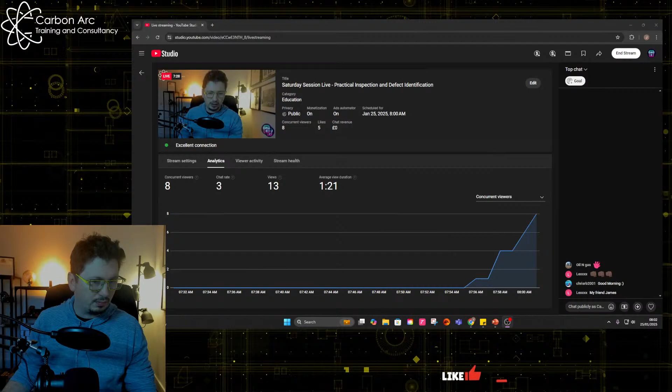First thing for us to capture - let me make sure I can see the chat as well, because there's too many things to do. There we go. Right, the first thing we need to make sure we cover is what the requirements for this practical session are.

The exam is used in two different versions of CSWIP, your 3.0 and your 3.1. It's the same practical now. For the plate, if you're doing a 3.0, you'll also do a fillet weld, but if you're doing a 3.1, you'll just do these 8 segments.

So again, I keep trying to point everybody to this document. You can go on Google and just type in CSWIP WI-6-92. This is the scheme document that tells you everything you need to know about your qualification, your entry requirements, your examination, your renewal, all that type of thing. A lot of questions are answered in that document, but this is where it tells us what the practical is.

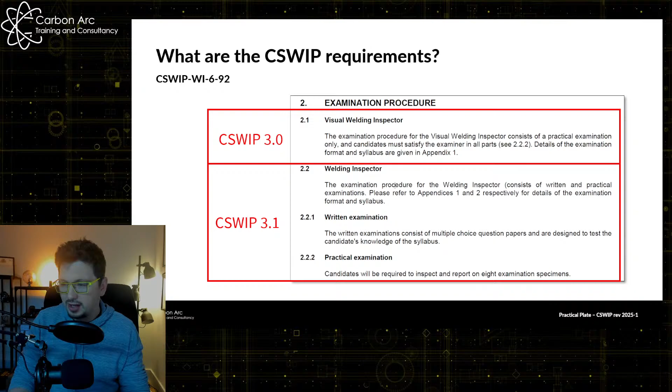So if we go to those sections, the references, those appendixes, we get this for the 3.0. So you have 2 parts. 3.0 is just practical completely, and you get a practical part A and a practical part B, which is your 8 segments and your fillet. You get 90 minutes for your plate segments, which is what we're going to cover today.

And then if you're in your 3.1, you're going to get 3 parts. So you've got your theory, your 80 questions, leading, all that type of thing.

Then you've got your welder quals and weld procedures, and then we have our 8 segments. Now, for some reason, they say 90 minutes in the 3.0 and then 1 hour 30 minutes for the 3.1, but they're the same. 90 minutes should be easily enough time for us to complete these exams.

If you're taking longer than that, or anywhere near that, you are looking in too much depth, and we need to work on the speed in which you're going through this. I honestly think this exam should take you, with 8 segments, about 45 to 50 minutes. That's what we want to be aiming to hit.

That gives us enough time for all of this settling down at the beginning of the exam, not being rushed, not being panicked, because the more panicked we are, the more problems that's going to cost us, making wrong decisions and stuff like that.

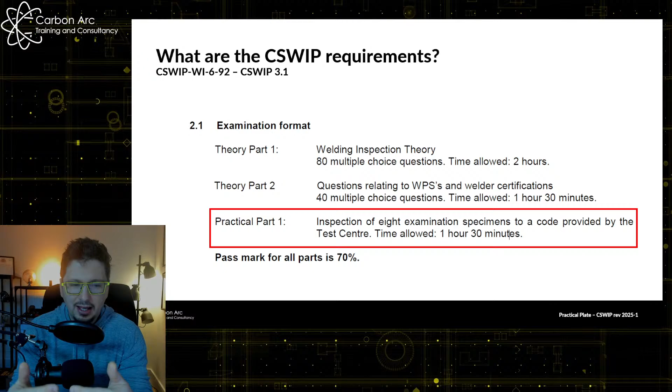So my first thing here is: only put down what you know is there. All the defects are really, really clear - there is nothing that's touch and go. Porosity, for example, was a really big thing for people - every time we picked up one of these samples we were like, oh, I can see gas pores all over it. Some of them were defect marks, some were really there. But when we look at the new acceptance criteria, porosity isn't there anymore, so don't go looking for it. Only look for things which are in the acceptance criteria and are clear.

I'm going to pick up one of these plates here - you probably see it on there. Does everybody see that defect? Give a heads up if you can, because if you can't, you shouldn't be inspecting, right? That's how big these defects are - we can see them a mile off. Now, some of them are tiny, but honestly, the ones which are 1 mil or less than 1 mil won't throw up a change in your mark. It's not enough to knock you out of a grouping or something like that.

That's where we get the exam requirements from, that's how you know. Now we should check this document fairly regularly, because it does change. The CSWIP committee meet often, a couple of times a year, and they'll look at how things are working and make changes. So always keep an eye on it and see what you need to hit.

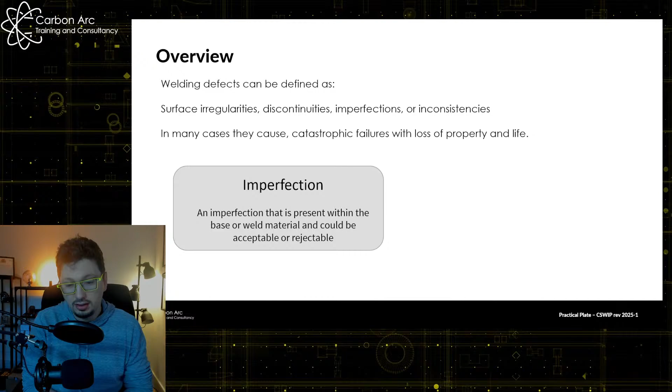The first thing we look at when we do any inspection is what imperfections can I see. We then need to decide if that imperfection is acceptable or rejectable, and at that point it becomes a defect - if we reject it, if we reject the imperfection, it's a defect. This becomes very tricky when we communicate about defects, especially when we mix British standards or ISOs and American standards, the ASMEs. These terminologies are really important - always read the question for what they're asking. This goes for both the practical and theory choices. Imperfections: anything out of perfect. Defects: things which are rejectable.

The whole exam is based upon really ISO 5817 - this is the European defect acceptance criteria. Has anybody seen this or used 5817 before?

It gives us time to have a cup of tea if I ask a question, you see, and I can check who's still here. Yeah, 5817.

It's a good standard. It's one based really on three acceptance criteria levels, yeah, and really it's one of my favorite, if that's the term for it, standards. What it allows us is to really detail every type of defect as we go down in one table, and nearly every defect is covered within 5817.

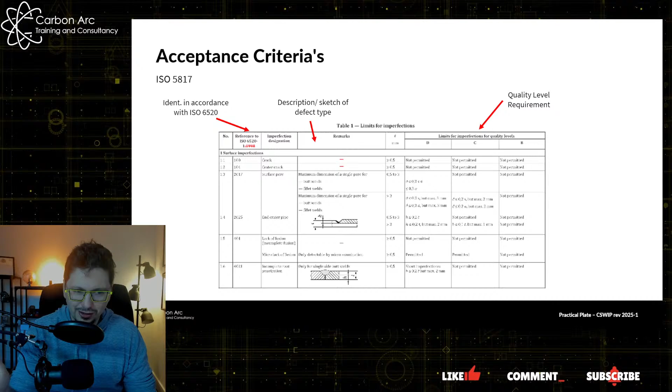We've then got our 3 levels of quality limits, okay? In 5817, we have class D, C, and B. So D is like why I wouldn't even bother looking at it if it was a class D. Class C is generally okay. B is our highest level of acceptance criteria within the standard. But often a lot of client specs work to things which are like B+. So B plus additional things that tighten it up a little bit more. But we can see on the screen here, we've pretty much got level B, everything's not permitted. Level C, some things are not permitted. Level D, most things are permitted with a bit of tolerance.

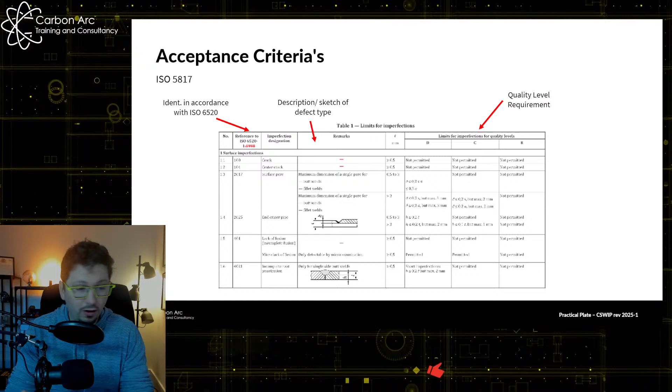Okay, so if we take that standard of 5817, CSWIP have really taken the layout of this to make your exams. Okay, so to understand these, have a look. You'll see some of the equations which are in 5817 are what you need to know for CSWIP because they're just taken from there. Right.

Okay, so let's start looking at the different parts of our welds and where we're likely to see issues when we do our inspection. Okay, so here's a macro section. What's a macro section? It's a relatively low magnification look at the weld, normally between 2 to 10 times mag. Okay, the idea here is we're looking for welding defects in areas of that we may potentially have imperfections within. You can often see the parent material, the heat affected zone, and the weld metal, but you can't see the grain structure. Okay, that's a micro examination, and micro exams are done at much higher magnification levels, depending on the material we're doing. It could be 2,500, 3,000 times magnification.

But using this macro here, we can identify a couple of different places. So in our exam, we are not going to be able to see internal defects. Yeah, so everything we're seeing are surface breaking imperfections. Right? And in the main, that's going to be on a weld toes, in the cap, and on the root. Okay. If you're trying to work through welding defects and work out what's happening and try and commit things to memory, just take all the internal defects and just get rid of them for the minute. Right, we will only see them when we come to do a macro or NDT of some type.

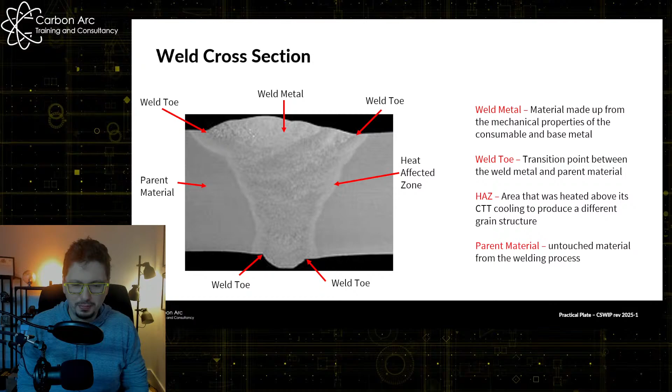We need a little bit more while we're waiting for people to tell me if they can find tungsten or not. Yeah, this is where it feels like I go quiet as people try to type away. Great content, me sitting here staring at the screen waiting for someone to reply. If anybody's going to reply, of course, I could sit here for 5 minutes and nobody type anything.

Tungsten would be within the body of the weld. Exactly, thanks Chris. Yes, Batam, hey, body of the weld. This is where we get our touchdowns, so we're going to bury the tungsten into stop starts or in it.

What welding process does that appear in? And I'm asking that, I'll wait for everybody to reply. But we've got to know the welding process. So if I said this was stick welded, SMAW, MMA, whichever version name we want to use, am I going to find tungsten inclusion? No, right? Yeah, everyone's saying that.

Yeah, so getting rid of that, right? I'm not looking for tungsten inclusion because I'm using a stick weld. I can forget about all them defects, right? If the welding process is stated as being MIG welding or mag welding, we'll say mag. MIG for aluminium, mag for steels. If I say mag welding, I don't have to worry about slag inclusions. We're looking for silica, right? And so understanding welding defect against welding process, we need to hit as well.

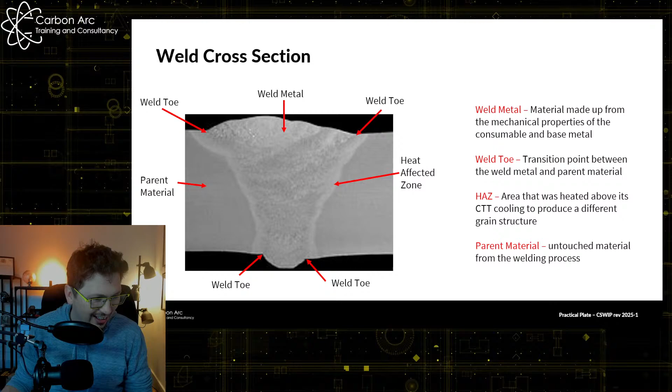Okay, right, so let's get into defects then. So here we have our first indication, right? You know, I'm looking at that. I've managed to cover this, I'm just going to move myself to the side here, if I can. Right, there you go, right.

Excess weld metal is not called reinforcement, that's our first thing, okay? Excess weld metal doesn't reinforce anything. The likelihood is it's going to cause us more issues depending on how big that excess weld metal is and the toe of the weld that it produces. In general, we can say the higher the excess weld metal, the more extreme the toe blend is going to be. If we limit the excess weld metal, most standards try to limit it to a max of 3 mil. The idea is that the toe blend will run evenly and smoothly with the base material.

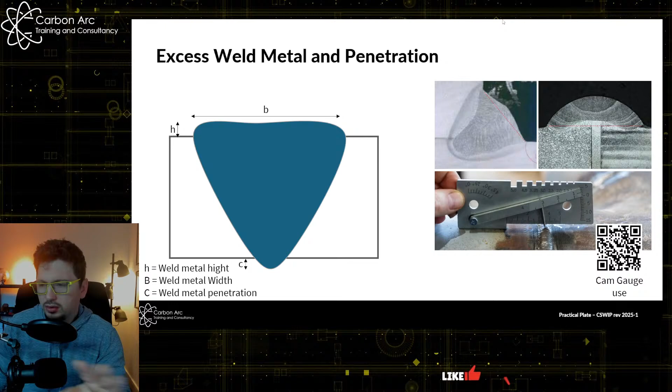Now, one of the easiest ways to do that is to take your finger and run your hand over your sample and feel if the weld metal dips down or not. Sometimes you can see it really, really clearly, like at the end of this sample here. At the end of our sample here, it's underfilled - it doesn't come up and fill the joint right the way up. I've also got underfill here along the center of my weld. We haven't got enough weld metal. So just feeling it and asking, is that under the plane of the plate or not, is going to tell us if we've got underfill or incompletely filled groove.

Now, in a lot of circumstances, we get two defects together. This is a big bone of contention with a lot of students and a lot of people who do the training and all this type of thing - why do I have to call both defects up if they're in the same location?

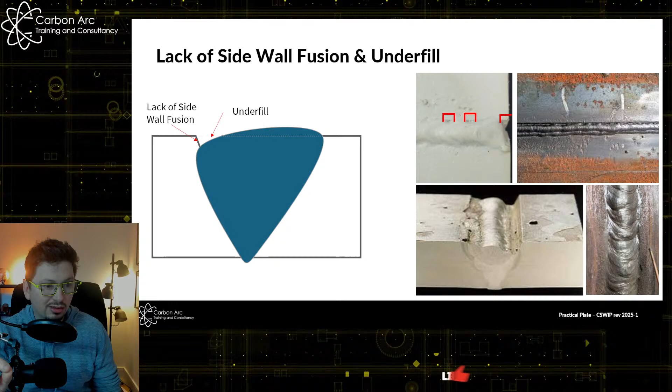So in these examples I've got on the board here, we can see we have underfill, and because we have underfill of the sidewall, we haven't filled the joint completely up, we also have lack of sidewall fusion. If you only say one defect in this location, you will lose your marks. So when we come in, the question asks us, do we have underfill? Yes, we have underfill. Do you have lack of sidewall fusion? Yes, we have lack of sidewall fusion.

But we can see, if I look at the one above here, this underfill - this one just has underfill, it's underfilled by itself because it's fused the sides. But this one has underfill plus lack of sidewall fusion, and we can see that all the way along in these areas.

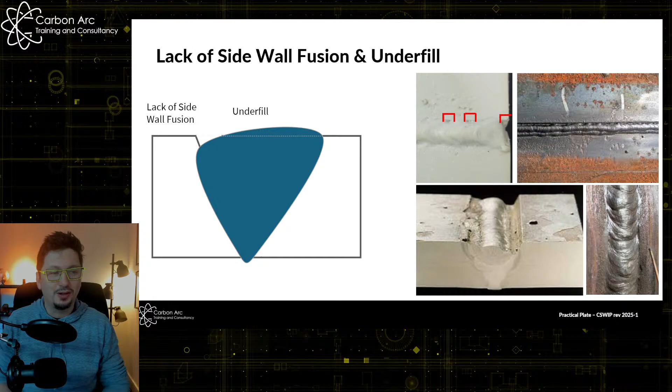Is everybody going to promise me that if they see or tick the box that says lack of sidewall fusion, you will also tick underfill? Because you can only visually see lack of sidewall fusion, surface breaking lack of sidewall if you have underfill. They've got to go together in this case. So many people miss that out.

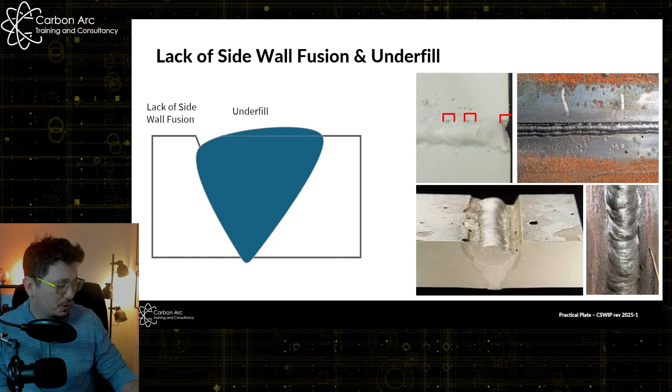Now, in reality, when we're out on a job and we're actually inspecting, are we going to do that? Probably not - we're probably just going to say lack of sidewall fusion. But for your exam, you're in an exam, you're not in the real world. So we've got to show we can do that. Have I harped on about that enough? It's a big thing that in every course I teach, people miss it. They will say one or the other, but not both. We have to say both.

Because that's the point of the exam, is to identify defects.

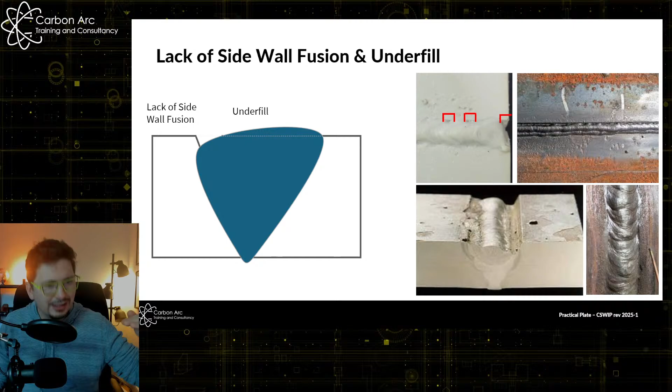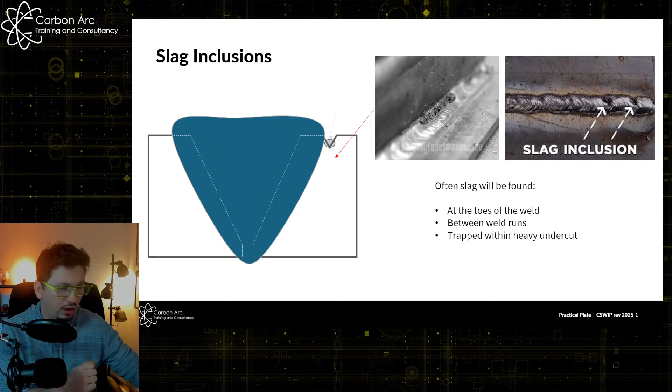Like I said, when we look at our sample here and we've got the lack of interrun fusion, it's potentially we're going to have a load of slag running down the internals here. If I was looking at this sample, would I have slag coming down here? Well, yeah, look, we've got some - potentially if I can get it in the light right - this bitty material in the bottom of this weld here, you can see where it's a little bit like moving around, that's our slag. Our slag is there because it's trapped in that underfill and lack of sidewall fusion. We haven't got it out, we're probably grinding and refilling and moving on.

Slag by itself generally has a fairly big acceptance criteria, but we don't want it, because it's going to allow other defects to occur, like lack of sidewall fusion, lack of interrun fusion, and so on.

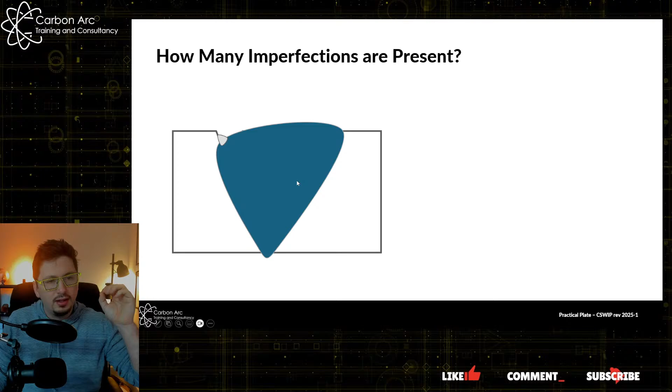So here's an imperfection on the screen. What do we think we've got? Can you tell me how many defects there are and what they are by this picture? Fairly simple picture, of course, but again, I get to have a drink.

And while people go to reply, I'll see if we've got any comments. No questions on lack of fusion, underfill. That's okay, cool.

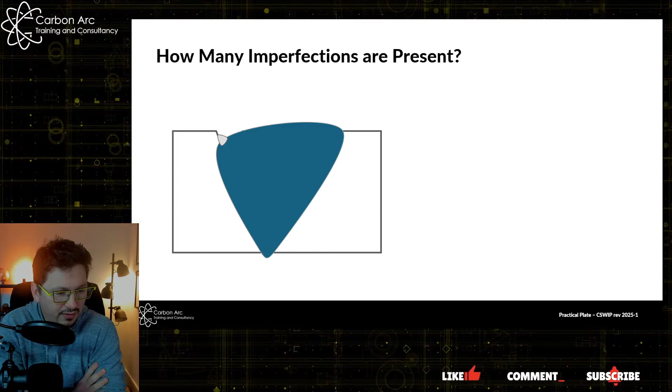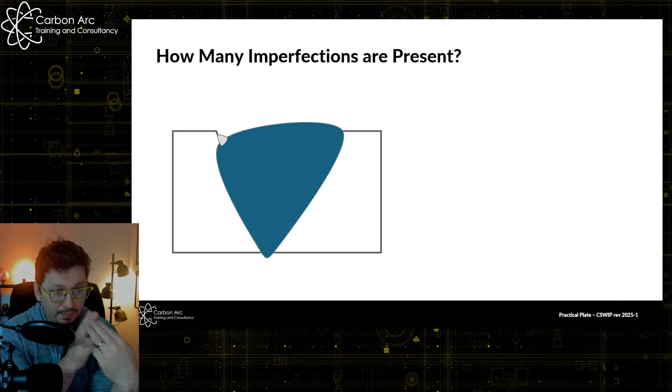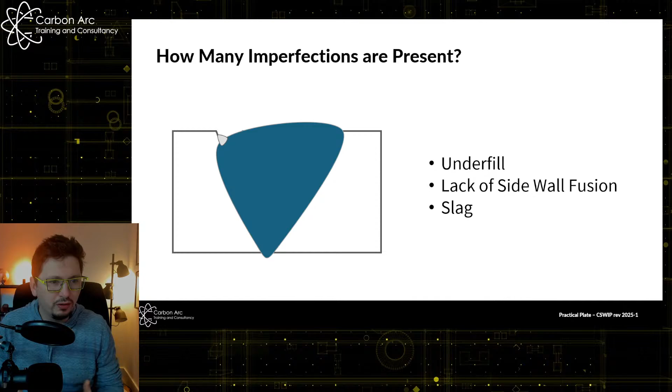So Chris has gone underfill, lack of sidewall fusion, and slag. And Danny, lack of sidewall fusion, underfill, and slag. Yeah, we've got a few here. That's great, that's right, that's what we want. So we've got 3 defects, which are going to need to be recorded separately, measured separately, and accepted and rejected separately. So I think I've got my underfill, we've got a lack of sidewall fusion, and we've got a slag. And by having all 3, we know there's quite a lot of things going awry with that weld.

Next one - a lot of questions around this for how we have stop starts. Stop starts is a new addition to the exam, which hasn't been there in the past. We used to just look for where we would have porosity and stuff on a stop start, but now it's how many have we got, what position are they, what's their spacing, and things like that.

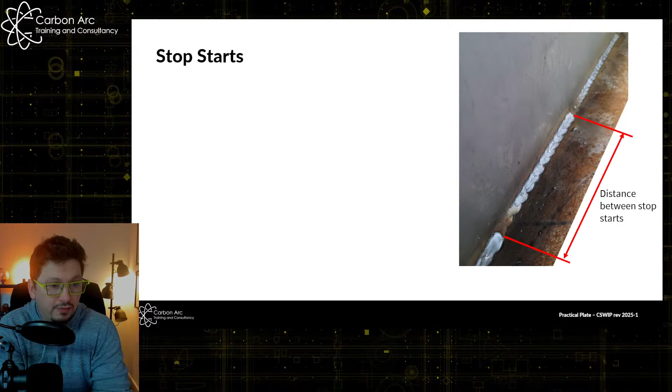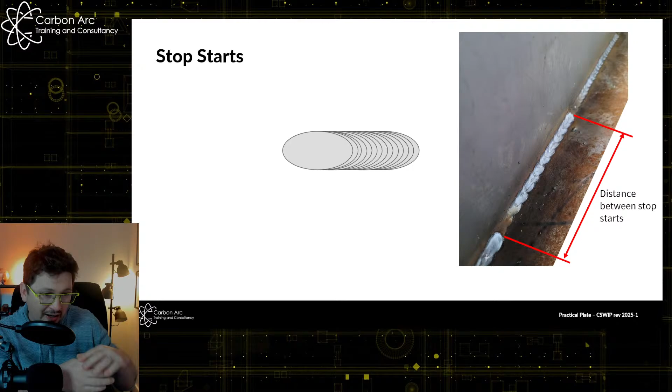On the board you can see stop starts where we've got a weld finishing and ending and then restarting. So what makes something a good stop start or a bad stop start? Really what we're looking for is these poor stop starts. So I've tried to draw this out, bear with me. We've been welding along, then we stop, and at the end of the weld we have that flat crater position, and then we restart to weld, and we come along, and we end up with something like this. Anywhere where we can see that overlap of the weld and that crater in the middle is going to be our poor stop start.

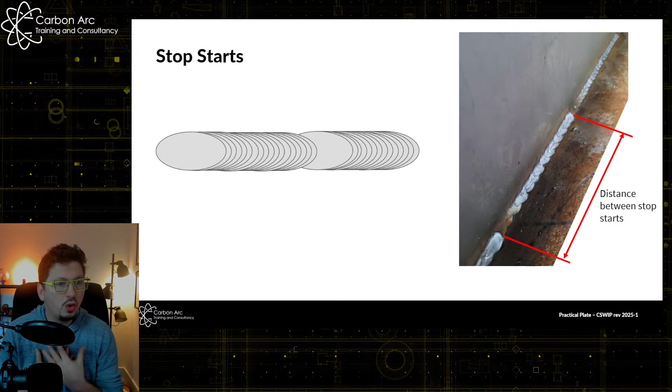I realised in the exams there were a lot of stop starts with crater pipes or previous weld craters. So that's what we're looking for - do we have that? Now how do I know that's what we're looking at in an exam? Because if we read the comments section within the acceptance criteria, it'll tell you what they're looking for. We're going to see that in a bit when we look at the acceptance criteria.

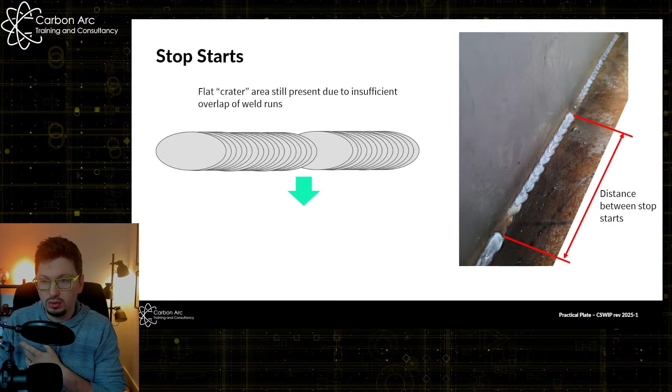So really what we want is to be able to weld, and then continue welding, so we lose that initial crater, so we have the overlap required. Now this is what it looks like on the cap of the weld, where if we had it on the root, what you would see is the weld coming along, and it would thin out and then come back up again. Now where it thins out, we're likely to get other defects.

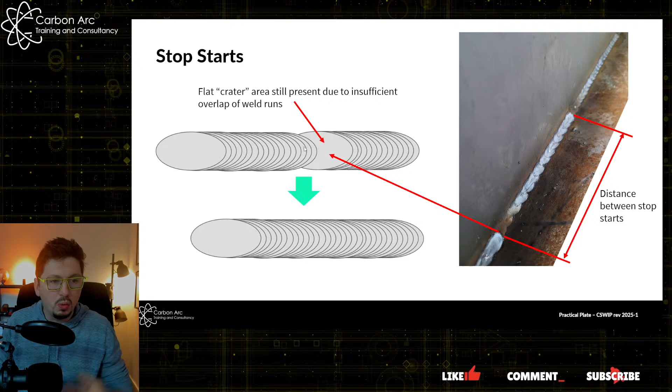So if I have this one at the top here, what defect is likely to be on the back side of that weld if it's a single pass weld? What do you think we're going to be looking for?

This is where we have to put the knowledge of looking at one thing and trying to work out what's on the other side of what we have.

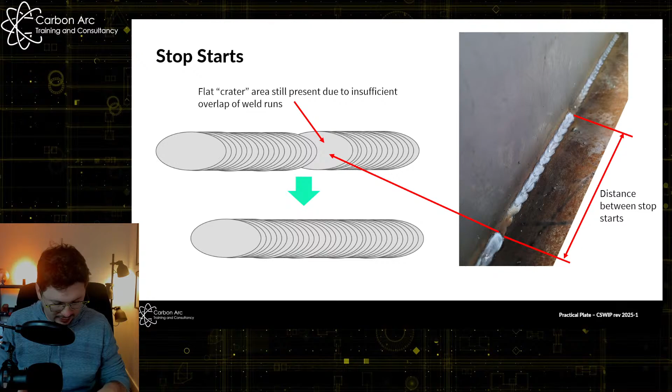If I've got a poor stop-start, likelihood is, yeah, like a lack of penetration. Thanks, Danny. Right, so look at this section here. Do you see where the weld's coming down here? We've got this area where we've been coming along with the weld, and then it thins out, and we've got potentially an indication right in the middle there, and then we carry on.

So it tells us that if we've got that bit at the top, we might start to have a defect on the other side. So a stop-start looks like this on the cap, and it looks like this on the root. This is the area we're looking for.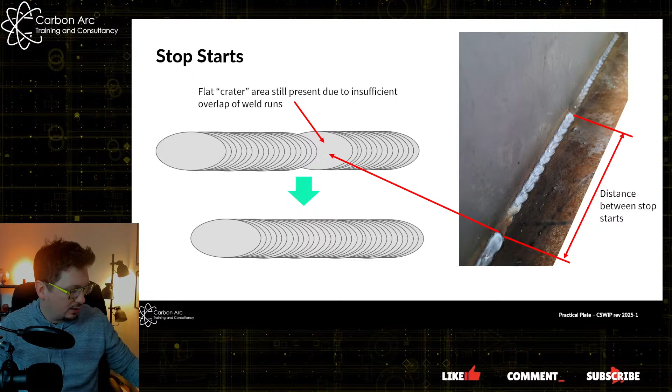I'm just trying to see if we've got one on our other sample. Not really. Okay, so stop-start. Hopefully that's okay for everyone. But yeah, lack of penetration, lack of root fusion potentially on the other side, depends how much it's come through, but one of those two is more likely. So you're right, Danny.

All right, onto undercut. Again, another one people have a lot of questions about, because there's normally quite a lot of things that will flag up if undercut is acceptable or rejectable. Really, there are three things we're looking for: depth, length, and sharpness.

Now, depth is really difficult to gauge normally, right? We struggle to get the end of our cam gauge into the defect, because it's normally quite thin, and the cam gauge nibs are quite large, so we don't want to rely on that at all. One way of doing it is to take our torch that you'll have in your exam. I'm going to use my mobile phone, but of course you can't have your mobile phone in the exam.

What we want to do is take our sample and cast the torch down the side. Now, can you see, we start to see areas of undercut depending on what we're looking at. If I turn this one over, that side there is really severe, really deep undercut, but I can see it running potentially in different areas down my weld. If I move my torch, we kind of want to see if we can find different parts.

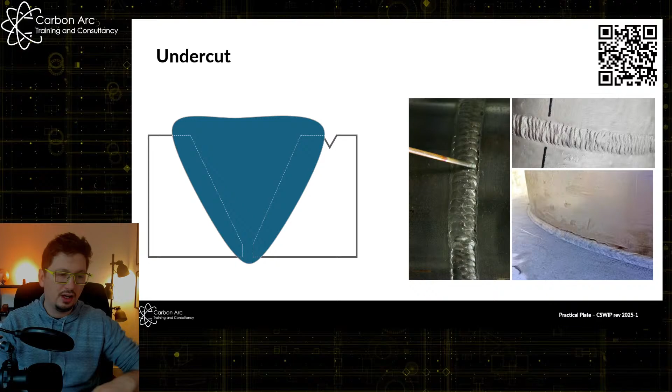So use your torches, take your time, get the sample in your hands. You're going to be using the cut-down samples, but get the sample in your hand, have a look around, see what it's going to be. Okay, so we're going to get that there, right? Undercut, we know the rules.

We know where it's going to happen. Undercut in the main occurs within the base material. Occasionally it could happen within the multi-run, where it bites into the run next to it, but personally I would just concentrate on it being in the base material, and then you don't have to try and add too much complexity to yourself.

How do we do depth then? Well, it's really a guess. It's kind of putting our best head on and saying, right, how deep is this undercut? I like to use my nails - I put my nail in and go 1.5 mil, something like that, or it's less than 0.5 mil. We're not looking for desperately accurate measurements here. As long as you're right in the ballpark, in my experience, we tend to be near enough where we need to be.

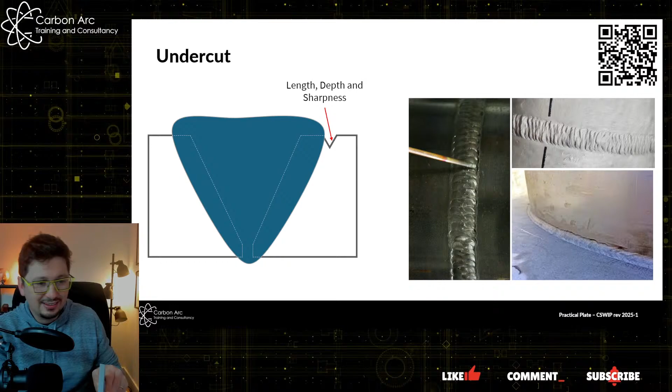When we talk about sharpness, it's two things - either sharp or smooth. If you can get your nail in and click the defect, it's sharp. And I would say most of the defects in the world that have undercut tend to be sharp. If you wanted to take a guess, you're probably 99% accurate if you say sharp, and we can go from there.

Surface porosity normally occurs around the stop starts. But what we're going to see is that, and you will see within your training when you actually do your courses, that the acceptance criteria doesn't have surface porosity in it. So it's one of these defects that for this exam we can forget about, but we still need to know what it is, right?

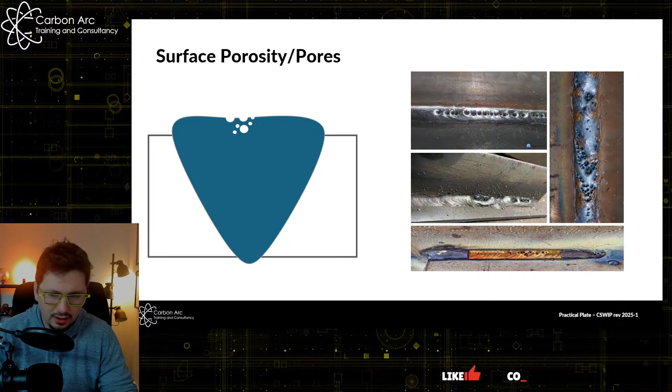Arc strikes, right? Hopefully everybody's been watching my video on time temperature transformation graphs. I absolutely believe that if you can nail that concept, you can understand a lot about the multi-choice questions in the exams. So arc strikes - always a bad thing. We tend to disallow them in pretty much all fabrication standards. In our samples, they're going to be quite large.

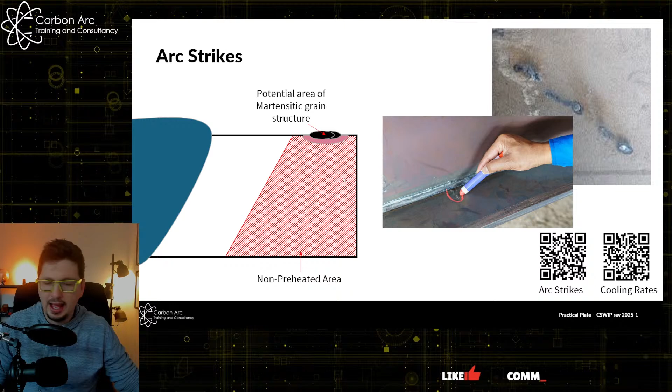So we've got one area here of an arc strike. This is where we are heating the material up quite rapidly from cold, so we get above its transition temperature. We change it all up to liquid and then to austenite and fast cool it. So now it has a much higher chance of being a martensitic structure, which is more likely to break. Again, we've got videos on arc strikes, identification, and cooling rates on the channel - give that a look. We're generally going to bang these out in areas, so you see one, it's one area, 2 areas, 3 areas, whatever that be.

Cracks. Now, again, we can look at our acceptance criteria and we'll see that for CSWIP, there is no acceptance criteria for cracks, so we can forget about it. That's all we need to say about that, really. If it's not in the acceptance criteria, we don't need to look for it. But cracks occur for a lot of different reasons - hydrogen cracking, stress corrosion cracking, fatigue, very common in service.

On to our root side then. So 3 defects, we know we have to nail on the root. If you mix these up, you're going to be dropping a lot of marks. The explanation of these defects is in the remarks section of the acceptance criteria, so there is no reason to miss these at all. But people miss them all the time. People seem to forget that there's guidance right in front of them, because you don't expect there to be.

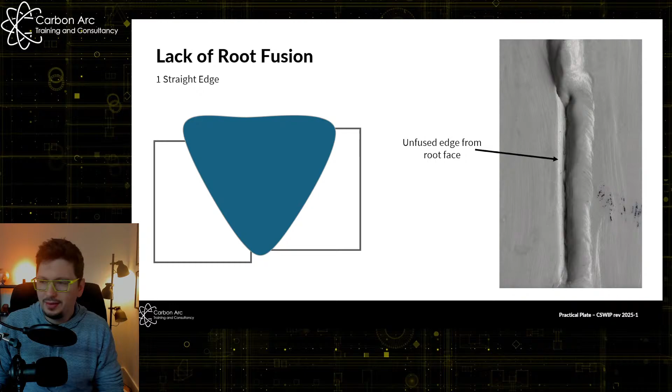If you mix this up, you will lose marks, right? Leon says, to add, I always look for lack of root fusion at the ends. Yeah, that's fair. Anywhere where we're going to come to the end of the welds and the weld is kind of let go and given up, especially if it's a test sample. If it's a qualification sample, he knows he's going to lose the first and last 25 mil, so you tend to give up at the ends. But nail this, right? There's lots of marks potentially in your sample. Depending on what sample you get, you could have all 3 of these, which means there's a potential 6 marks gained or lost in this circumstance.

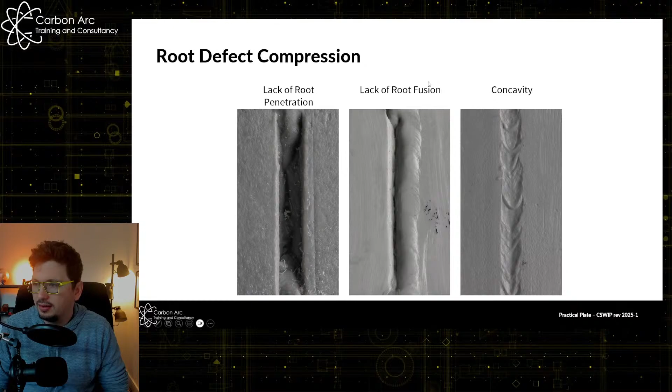What we've done there is just gone through the definitions of our defects, right? Now we can go back and have a look at how do we apply those definitions to an acceptance criteria on some test samples.

But before we do that, I'm just going to have a look at the comments. So what we got, when was the last time I actually saw anything? So I've read that one, read that one.

Oh, Chris, I took my course in Thailand last October. The training was amazing. I don't know the guys out in Southeast Asia, I've never actually had the pleasure of meeting them. When I used to teach, there was literally just us from the UK, there was no other team. There was 3 of us - me, David Page, who's now the section manager for weld inspection, and God rest his soul, Martin Farven, who passed away a few years ago. But there was only us 3 doing pretty much the entire world, so I never got a chance to meet anybody. I'd love to get out there. Maybe when I'm back in Singapore or something, I'll have a jump across.

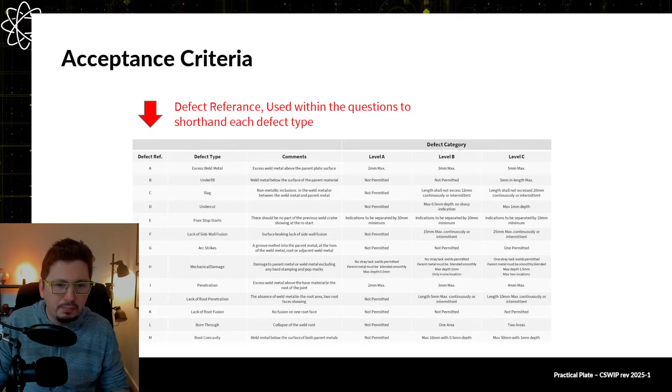Here is our 5817, our acceptance criteria as we stand. We're going to look through this. I don't know if this is big enough, sorry, I'm just going to see if I can make the screen bigger. Should I zoom in a bit as well? Right, hopefully that's bigger, I didn't realize how small it was going to be on the screen. I'll move myself right away over here to the side. Okay, where was I? I've lost my trail of thought trying to read comments and that as well.

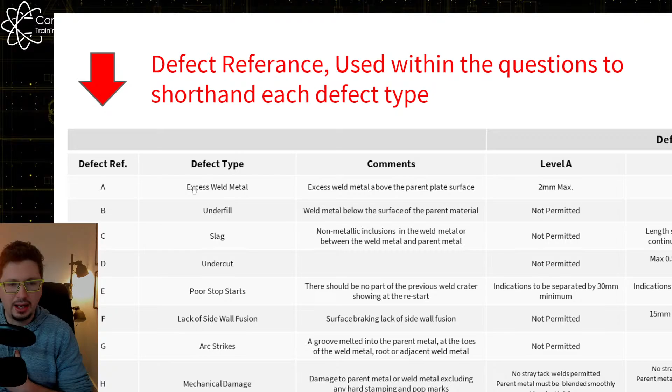So the acceptance criteria is kind of based out like this, okay? So you have a defect reference, so A to whatever, right - B, C, D, E, F, G. This is how our questions are going to be answered. So instead of having excess weld metal underfill on the boxes, we're going to answer in, it's just going to be the reference, okay? So for every reference we have a defect type - I'm going to have to come out with this, aren't I? Right, the defect name - our defect name here is what we're looking for. Yeah, everything we've just been through as the definition section.

We've then got our comments, which are a description of what that defect is. So again, if you're worried and can't remember what a defect is, have a look at that, and you just need your reassurance.

And then we've got our three acceptance categories. I've named them for my version of this - I've just called them level A, level B, level C. It doesn't really matter what we call them, it's just 1, 2, or 3. So we've got our acceptance criteria, we know everything we need to have.

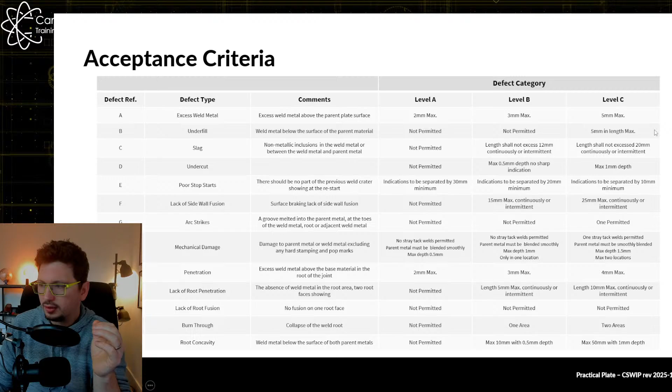You can see here, I've purposely missed out the comment for undercut. Do we remember how we would describe undercut? Give me the three things that we need to take account of and where the defect is likely to occur.

Can I show you something cool?

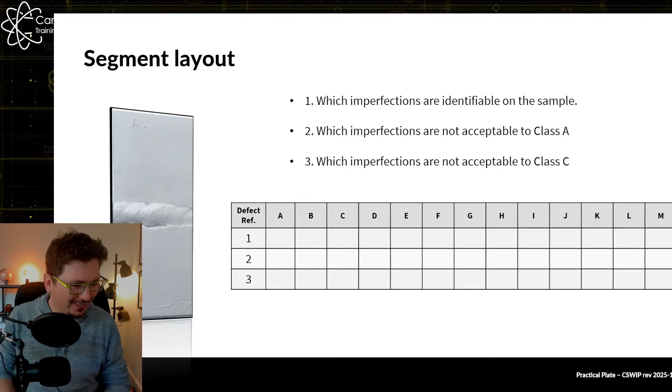Oh, so like clockwork, Leon says exactly what I'm after. Thank you. The tablet was so annoying to use, so I took a sheet of paper. Exactly. That's my biggest tip with doing this exam.

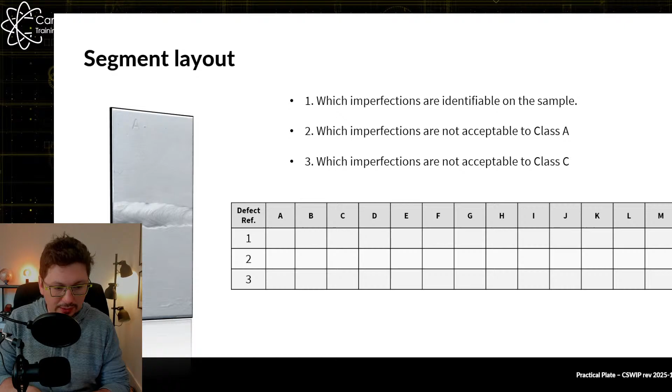You have a note piece of paper. You can do any notes you want. You're not allowed to remove that paper from the exam, so it's just junk, it won't be marked. Write your answers down on that first, and then come back and fill in the tablet. You have more than enough time, okay? I promise you it will be enough time. You'll nail it really quickly, okay?

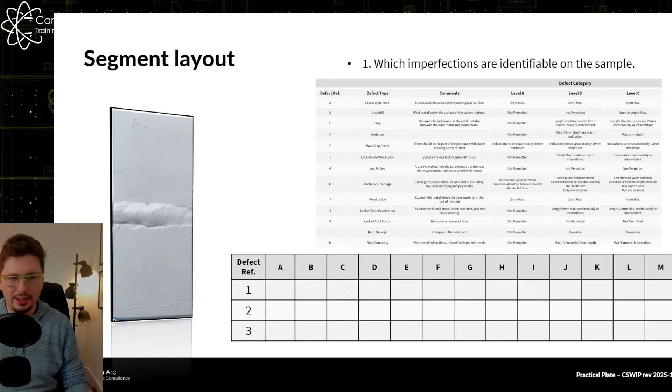So you've got that along here. Right, so we have our three things. We have our tablet, we have our segment. Again, I'll move myself out of the way here. We have a segment here, ready to inspect. We have our answer sheet along the bottom. And then we have our acceptance criteria. If you've got them three things on the table in front of you, we should be good, right?

Next, we need to start inspecting our segment. So the way to do this, or the way I do it, start at the top of our acceptance criteria. First question, do you have excess weld metal? The answer is pretty much always going to be yes, isn't it? So if yes, we have excess weld metal, we have A, so we put a cross in the box, right?

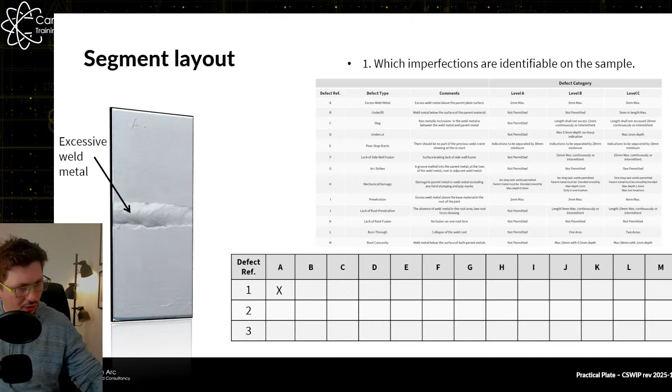Do we have underfill? Have a look at it. What is underfill? Any point at which the material drops beneath the plate level. Use your fingers, feel it, run your hands over it, okay? I'm going to say I have underfill in my segment, so I'm going to put an X in the box.

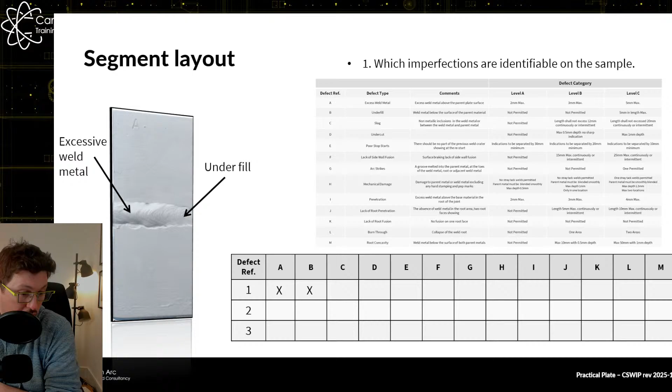Yeah, so I've just seen Leah's comment here. For me, it was uncomfortable to do the check on the samples because they're on the keychain. I agree. Having them all put together, it does make it a little bit more difficult. I've found like lying out the sample, like the keychain on the table, and just pulling out one individual one, and then trying to deal with that makes it a little bit easier. But I completely understand your frustration with that.

Yeah, so we've got underfill. C, do we have any slag? I don't think we have any slag on this sample, so I'm just going to leave C blank. Then I can go to my next one, and my next one is undercut, which is D. I have undercut, so I have it there. So you see what I'm doing?

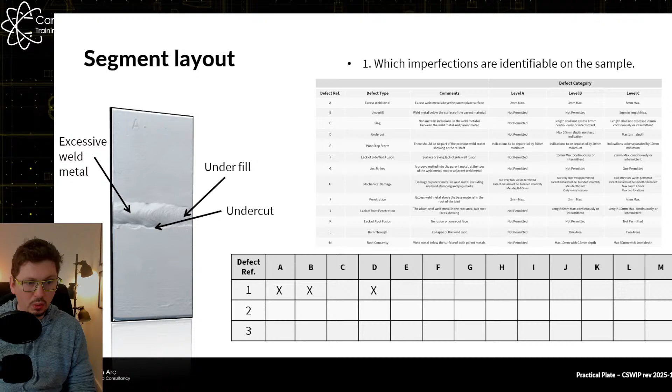I'm not trying to blindly inspect the whole segment in one go. I'm using the acceptance criteria to structure my answer and come down. Then I know I don't miss anything, right? And I can get to the end, I can get to defect M, knowing I have looked for every defect. And I don't have to panic. Oh my God, did I look for lack of pen? Well, I must have, because I went down the acceptance criteria, okay? And we go from there. So that's what you're going to do.

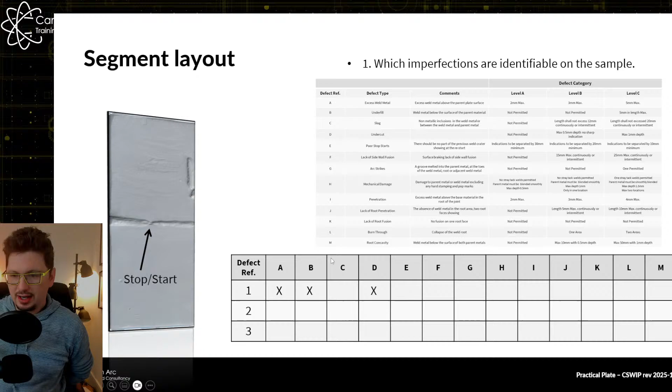You're going to go through, and so then we're going to turn our sample over. So then I can say, right, I've got a stop-start. We can see where it's a stop-start disappears in. Let me zoom in on that. So you can see here, the stop-start kind of pulls in here. We've got potentially another defect there, so we might have to look at that in a little bit of view. So E is my stop-start.

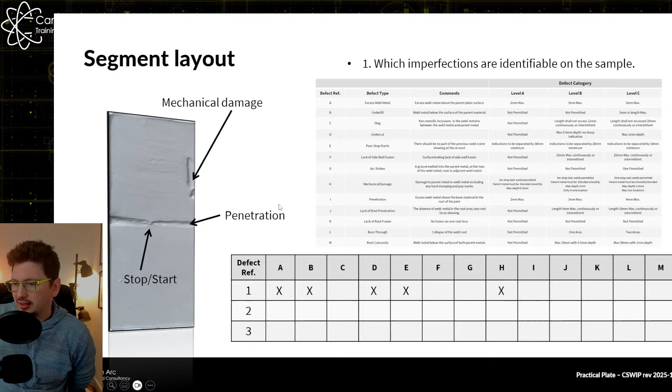Mechanical damage, H. So mechanical damage, anything that you don't know what it is, but you know it's damage to the sample, okay? That's what we're looking for here. We've got our penetration, I. So we know we've got penetration, so we put an X in. Our lack of fusion, which is that bit we saw just before there. How do I know that's lack of fusion? Because I can see one straight line disappearing down there.

Then K, so J, there's no lack of root pen, so I'll leave it blank. K, I've got my lack of fusion. There you go. L, burn through, no.

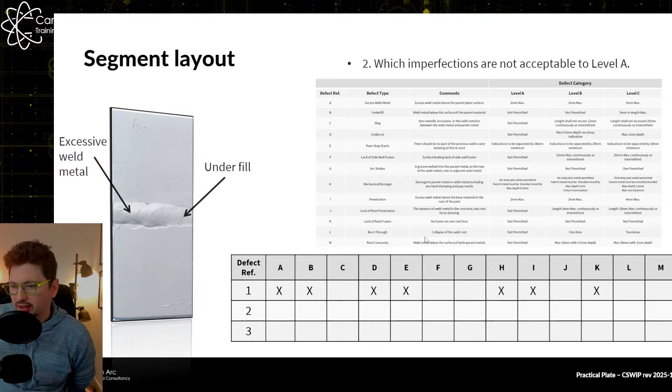So there I've got my first set of question ones. Which imperfections are identifiable on the sample? So we found 1, 2, 3, 4, 5, 6, 7 defects, right?

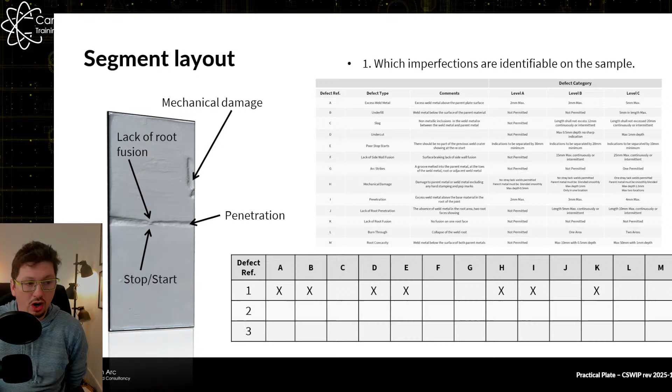My next question, we've said we don't have any slag, so do I need to check that again? No, I've said I don't know. So now I can speed up with the rest of my inspection because I only need to look at these 7 defects. I don't have to look at A to M again, right? And we've done that relatively quickly by following our segment all the way down.

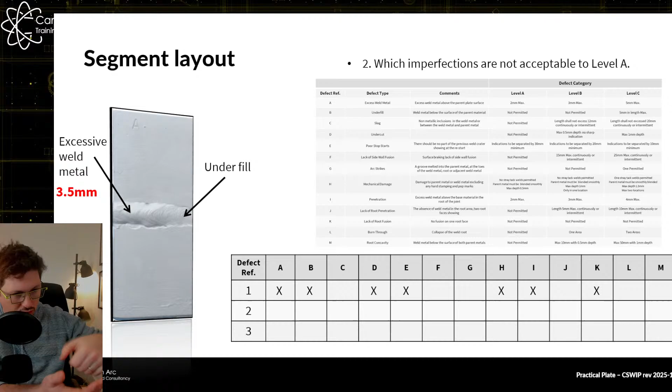Next question then, which imperfections are not acceptable to level A? This is where we now need to do some measurements, okay? So what we're going to do, excess weld metal, I'm just going to measure it at 3.5 mil. I use my gauge, check that, and then look at my acceptance criteria.

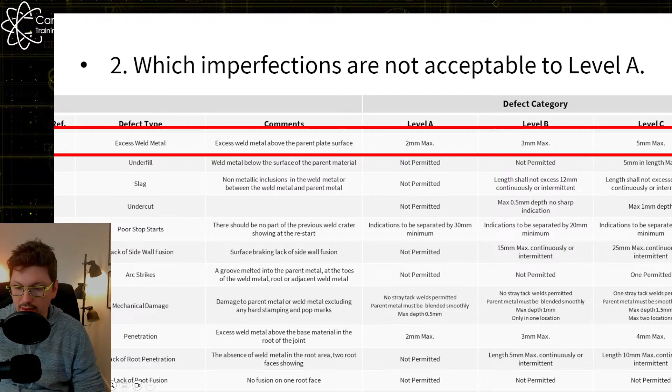So looking at my acceptance criteria, I'll zoom in on this section. So A, excess weld metal, excess metal above the plate. We're looking at level A, so I'm allowed a maximum of 2 mil. I've got 3.5 mil, so an X is going to go in my box, because I've found a defect which is not acceptable to level A.

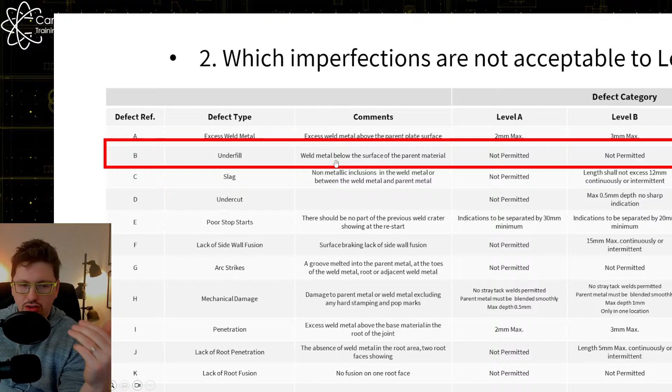And I need to do the same for underfill. I've measured it being 4 millimeters long, it extends for 4 mil. What's my acceptance criteria? Let's zoom in. So B, underfill, I reassure myself it's anything below the plate. Level A, not permitted. Great, nice, easy, don't need to think about it. If it's not permitted, it just gets an X in the box. I don't need to do C.

I can move to D, which is my undercut, which I'm going to measure at 0.8 millimeters deep, and I'm going to say it's sharp. So there we go, again level A, not permitted. Doesn't matter how deep it is, let's just get rid of it. So D, X in the box.

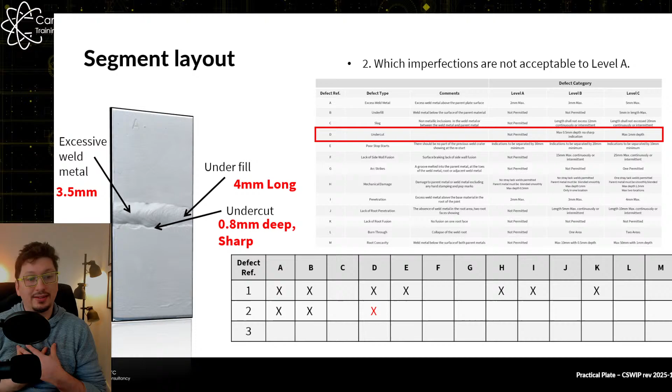Again, try to be structured like this. Next month it's my 15-year renewal for my 3.2 that's up, but luckily it's just a CV renewal, it's like the 5-year version. But when I sit my practical exams like I did 5 years ago, this is exactly how I do it. Just work through, keep it going, keep it moving, okay.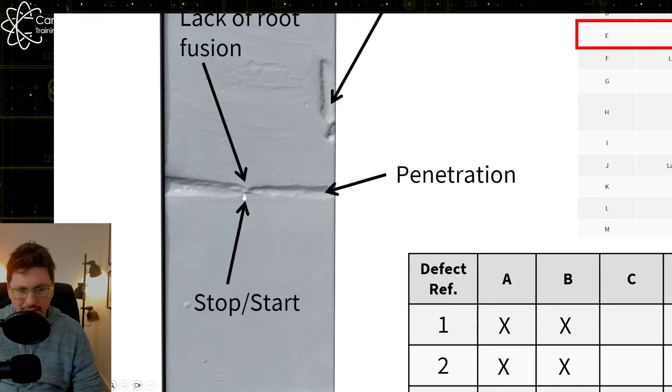Then I can come to the back side, so we'll need to look at E, poor stop starts. Again, we think we've got a poor stop start in this area here. So poor stop start, indications must be separated by 30 millimeters, that's what it's saying up here in my acceptance criteria. But I've only got one, so they're not separated from each other, are they? So I would say that I can accept that because there's only one defect.

If I had 2 stop starts relatively close to each other, then I'd measure the distance and I'd go from there. So I'm going to leave out E and I'm not going to put an X in because I think it's acceptable. Then we're going to go mechanical damage.

So mechanical damage again, zooming back in on here. No stray tack welds permitted, parent material must be blended smoothly, and the depth, if I've caved it out, has to be a maximum of 0.5 mil. So straight away we can see a weld left, and I'm not allowed that, therefore it's a reject, put an X in the box.

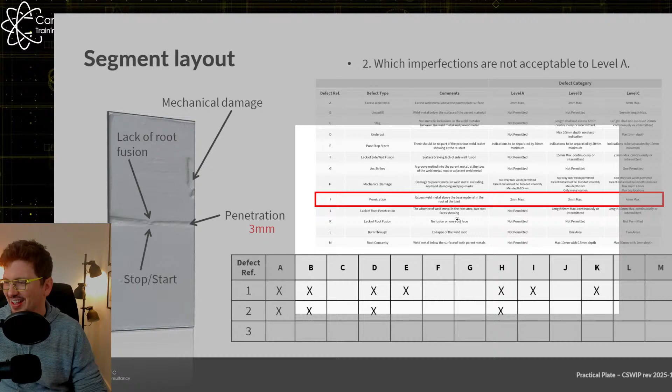Right, penetration height, so I need to measure this. I'm going to measure it at 3 mil. Again, I'm literally going to step through all of these. Come to it, penetration height, the max is 2 millimeters, but I've got 3 millimeters, therefore X in the box.

And then I can miss J, because I've got no lack of pen, straight to K, lack of root fusion. It's not permitted, and I have it, I don't even have to measure it. But I will, I'll say it's 1.5 mil, but it's non-permitted, X in the box.

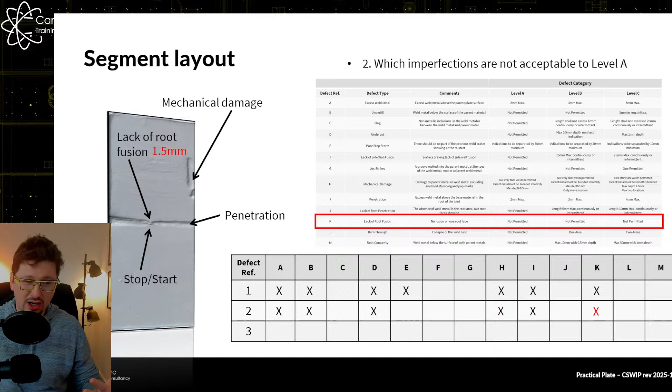So you see the structure we've got here. Question 1 has quite a lot of defects running across the top. Question 2 will either have the same amount of X's, but I think, looking at acceptance criteria in general, it'll actually be maybe slightly less X's in the box. So you can see we actually got 1 less because we accepted indication E.

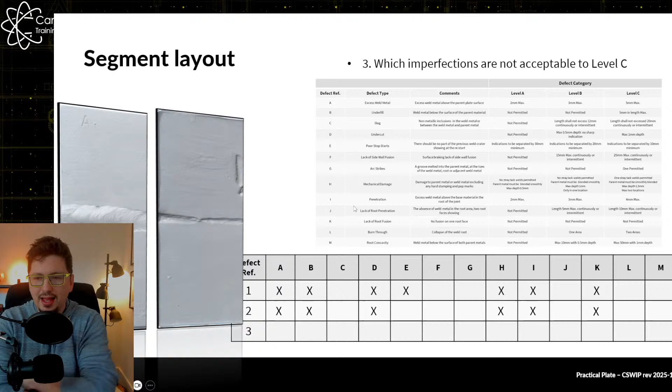So when we move to question 3, which is next, how many X's are going to be in the boxes? Is there going to be more, less, or the same? Because now we're working to an acceptance criteria which accepts quite a lot more stuff, so there should be less, is my gut feel. I don't know what exam you're going to get, I don't know what the sample's going to look like, but logically I can see a lot. Question 2, I'm going to reject a lot. Question 3, I'm going to reject less. So we should see this pyramid shape of defects coming down as we go.

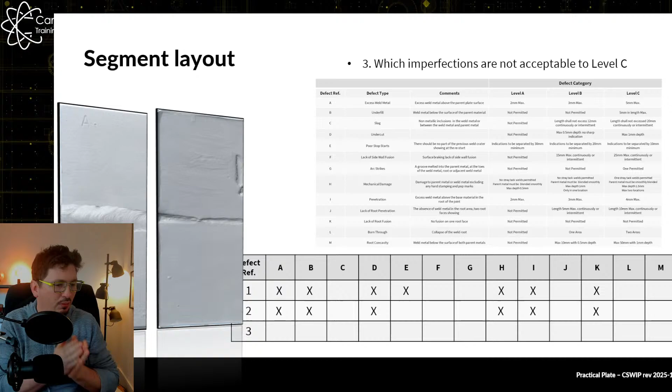If you have more defects in question 3 than you have in question 2, you've done something wrong. We can look at it and fix it. If you're sketching it out on paper yourself before you answer in your tablet, that should be easy to see, hopefully.

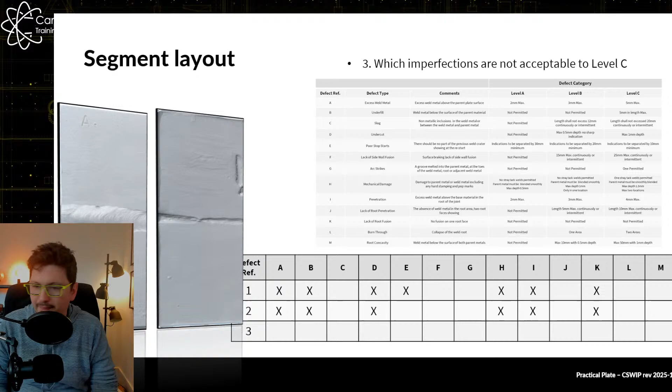I'm not going to go through level C to that extreme, but if you want, replay this video, go back through it. When you get to this point, have a go at doing Level C with the measurements I've given. What do you think is acceptable and rejectable? In the comments, I need comments for the algorithm. Stick in what you think the answers are, and then we'll have a discussion about it and see where we get to.

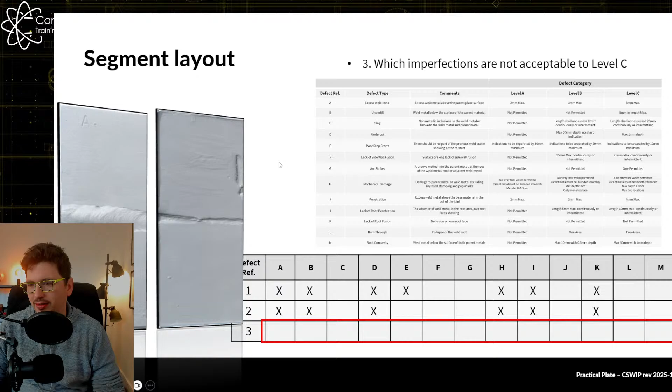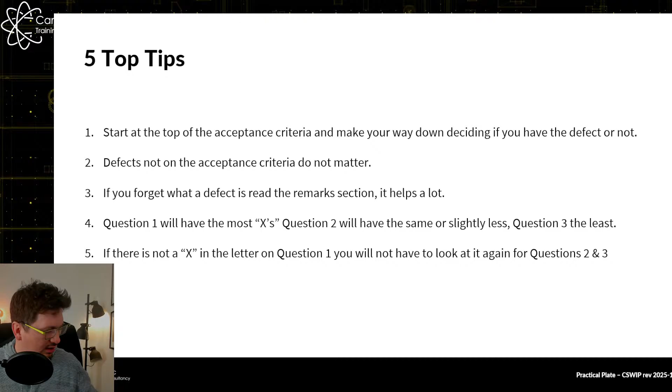So that is pretty much all of the practical and how we hit it. Now let's go through my 5 top tips, 5 things I think you should do in your exam. Number 1: start at the top of the acceptance criteria and make your way down. Just use that to gauge which defects matter, then we can forget about all the other nonsense that's going on. Is it a bit of porosity or isn't it? Who cares? The acceptance criteria doesn't ask you, so just go and do something else.

Number 2: defects that are not in the acceptance criteria do not matter. Don't care how many you have, you're going to ignore it. Number 3: if you forget what a defect is, read the comments, the remark section. It's going to help you an awful lot. People forget defects, exams are stressful. Make them as easy as you can by using the information you have.

Like we said before, for tip 4: question 1 will have the most X's, question 2 will have a little less, question 3 probably a little less again. It's a good way of just cross-checking yourself. And if there is no X in question 1, you're not going to think about it anymore, you don't need to look at it. Move on, save your time.

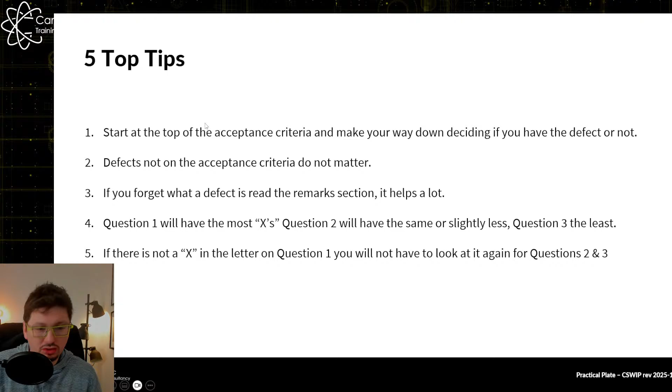You have 8 segments to do. That time needs to be used productively, not rechecking things you've already checked. If you can generally hit these 5 points, you're a long way there to making sure you can achieve the practical part of the exam.